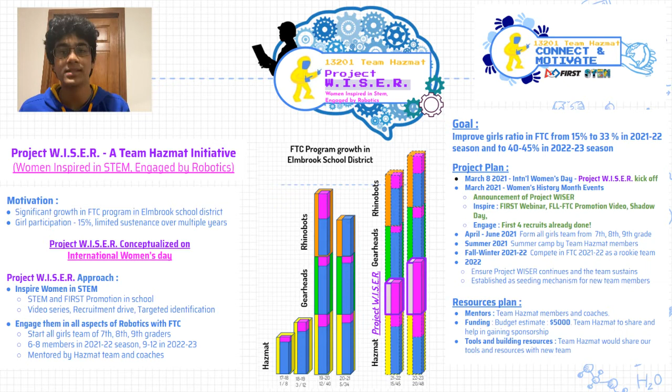After spinning off 2 new successful teams last year, on International Women's Day, we announced our newest initiative, Project WISER, which stands for Women Inspired in STEM, Engaged by Robotics. Our focus is creating an all-girls FTC team mentored by us.

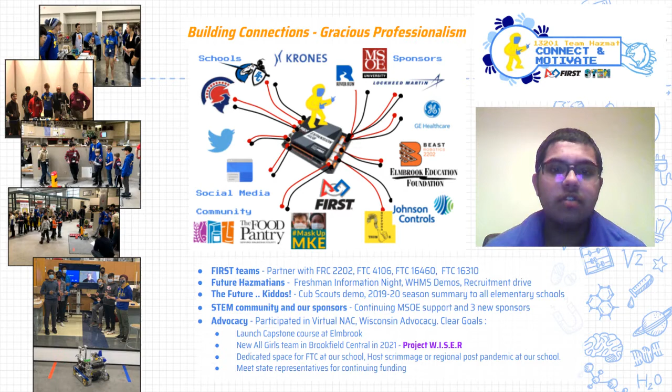We participated in the virtual NAC and Wisconsin State advocacy meetings. We are pushing our school for a dedicated first robotics space and a Capstone course.

To support our community throughout the pandemic, our team worked together to make and donate more than 4,000 masks and joined hands with our school's Key Club for an all-school food drive for the Waukesha Food Pantry.

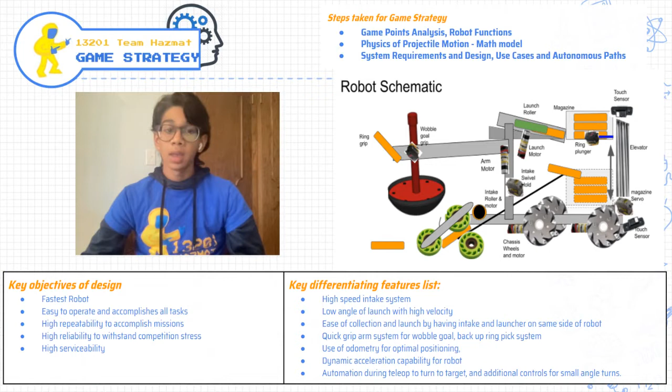Our objective as a team this year is to learn more engineering design concepts and, of course, do our best in the competition. We set the goal to build the fastest robot that accomplishes all tasks with high repeatability and reliability.

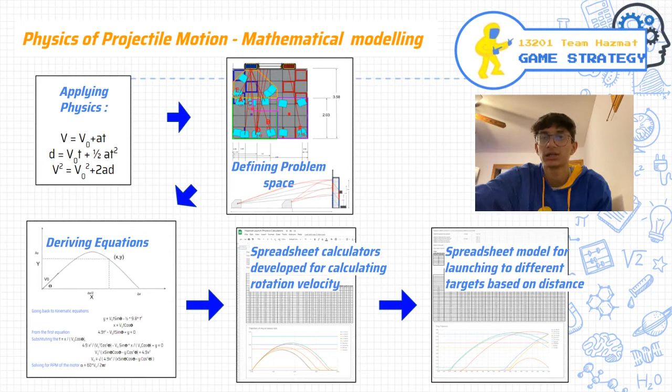We mathematically modeled the key goal of launching the rings using physics concepts of projectile motion. This helped us to determine ideal launch height, angle, and range of velocities for different targets at different distances.

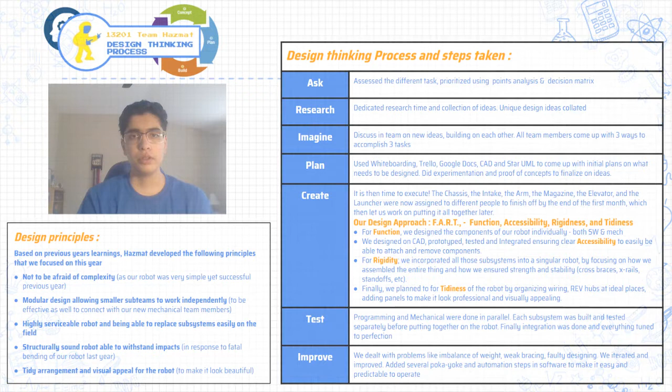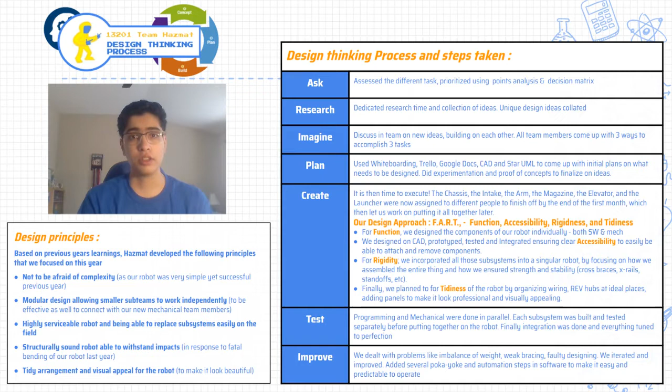We used design thinking principles and applied learnings from our experiences last year to come up with our approach, FART. This involved defining the functions for each subsystem, designing them with CAD, prototyping, and testing them, then integrating them with easy accessibility, ensuring rigidity of our overall robot, and finally creating a very tidy aesthetic with clean wiring and good visual appeal.

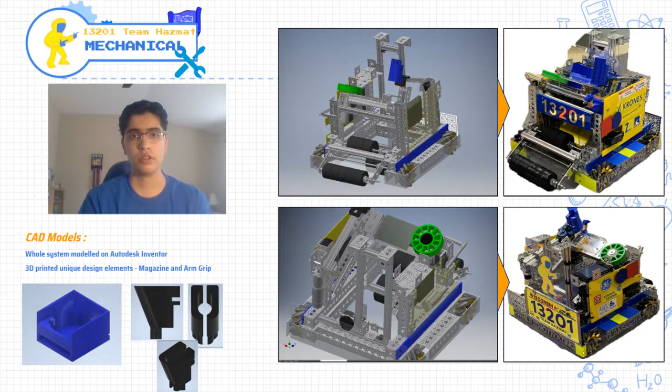Our chassis has direct drive mecanum wheels on an A-frame to provide for stability while giving room for the rest of the subsystems to be fit.

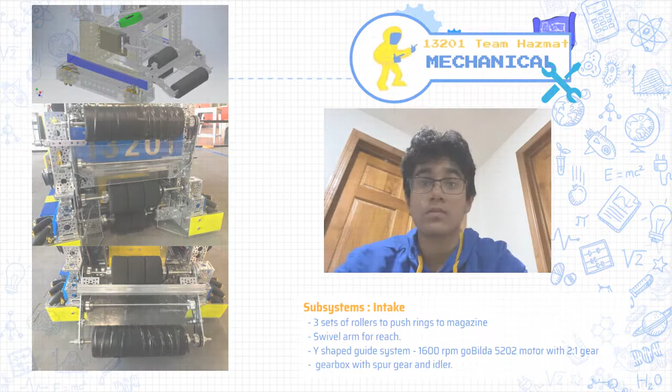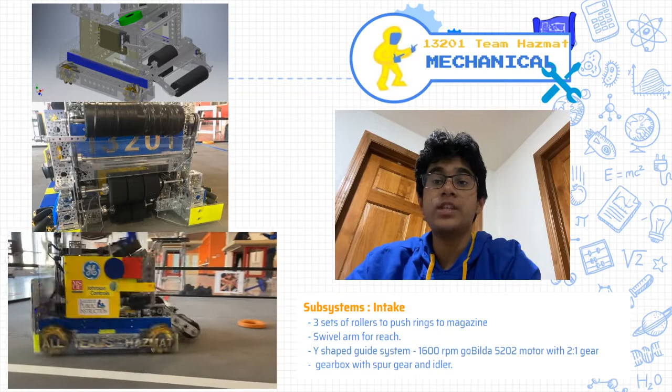The intake design is based on 3 sets of rollers to push rings to our magazine. The front rollers are on a swivel arm that drops, giving us wider reach. The Y-shaped guide system makes it easy for the drivers to pick up the rings.

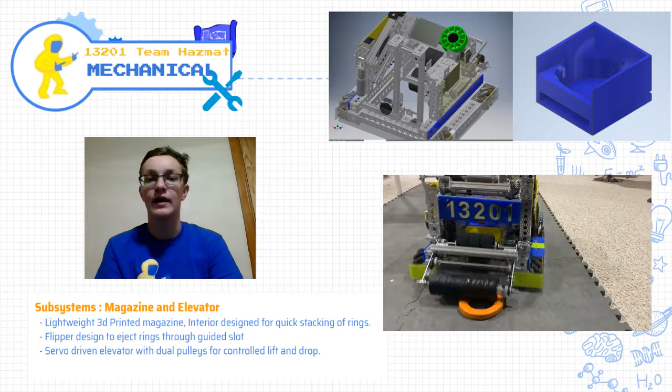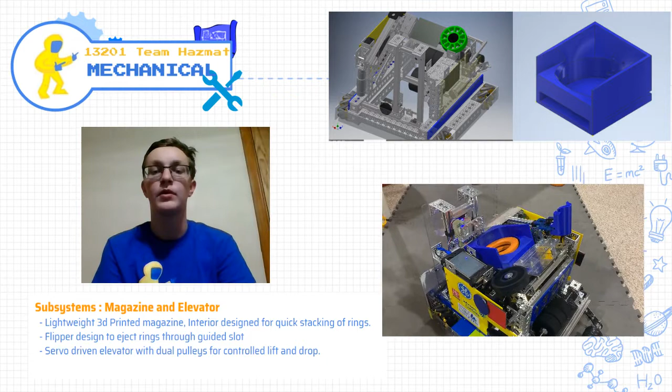Our lightweight magazine is a 3D printed block. The interior is designed for quick stacking of rings. It has a unique flipper design to eject the rings through a guided slot and retract while sustaining the stack. These move on a servo-driven elevator with dual pulleys for controlled lift and drop.

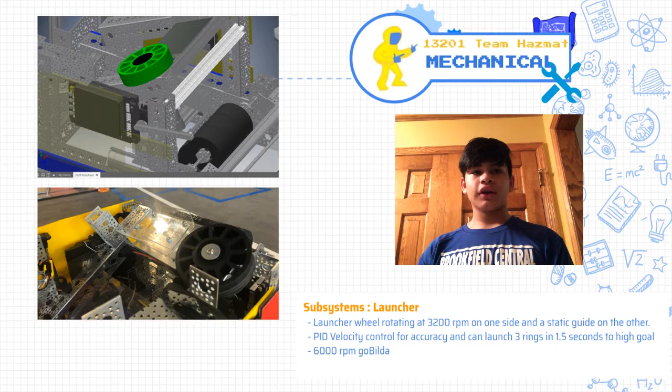The rings are guided from a magazine to a launcher wheel rotating at 3,200 rotations per minute. On one side there's a static guide, and on the other we use encoders and PID velocity control for accuracy, and can launch 3 rings in 1.5 seconds to the high goal.

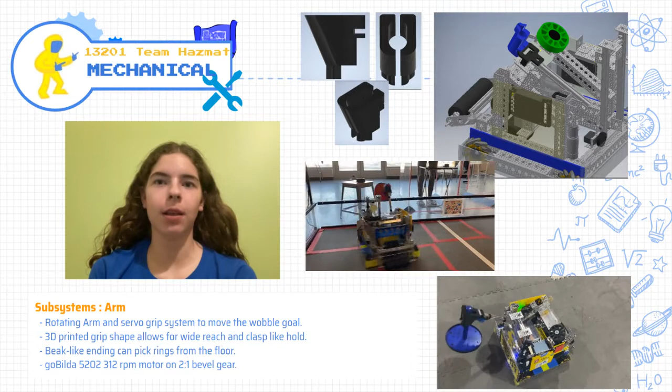We designed an arm and servo grip system to move the wobble goal. The unique 3D printed grip shape allows for wide reach and enables us to pick up the wobble goal from any orientation, including when toppled. The beak-like ending can pick rings from the floor as well.

The modular design and assembly ensured easy access for serviceability. We ensured all the wiring is clean and protected, added metal and plexiglass panels for protection, and tuned the robot for performance. Finally, we added our team colors and sponsor logos to finish our robot Requise.

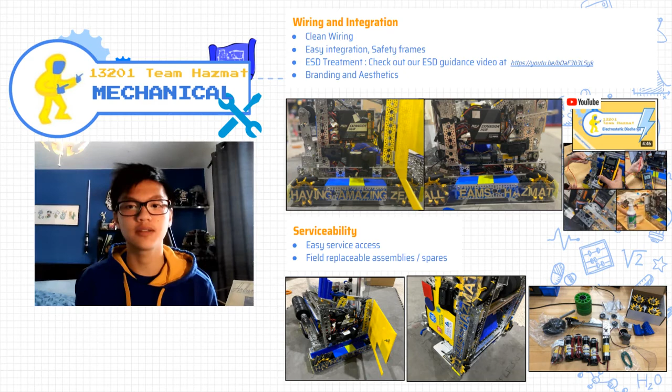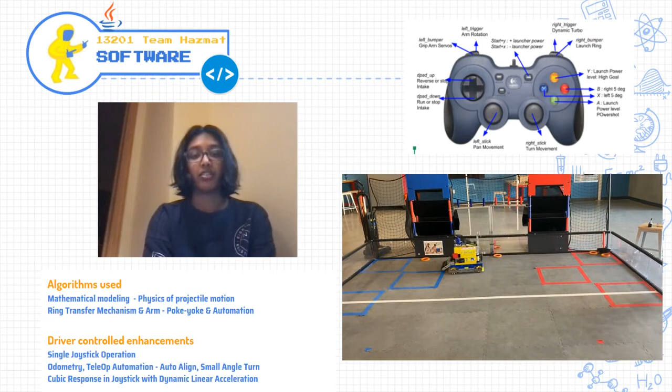We added automation during teleop for precision. Our unique driver control is based on a single gamepad and incorporates multiple automation steps, poke-yoke logic, and a great drive experience.

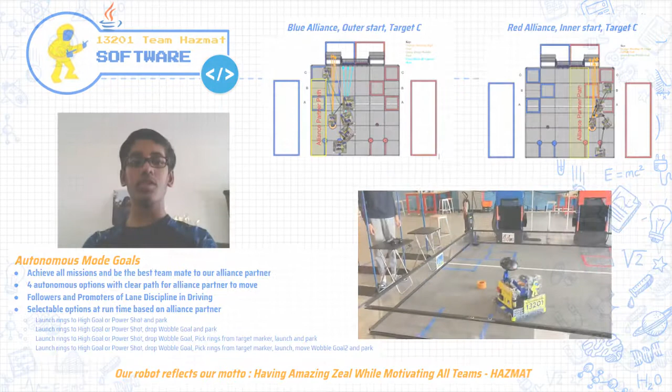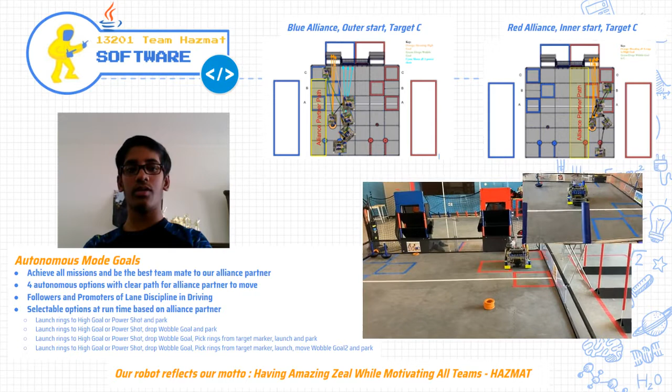In our autonomous mode, we can execute all scoring actions and select missions at runtime on the keypad. Our robot is a team player with paths that allow our alliance partner enough space to navigate and choose actions based on their capability.